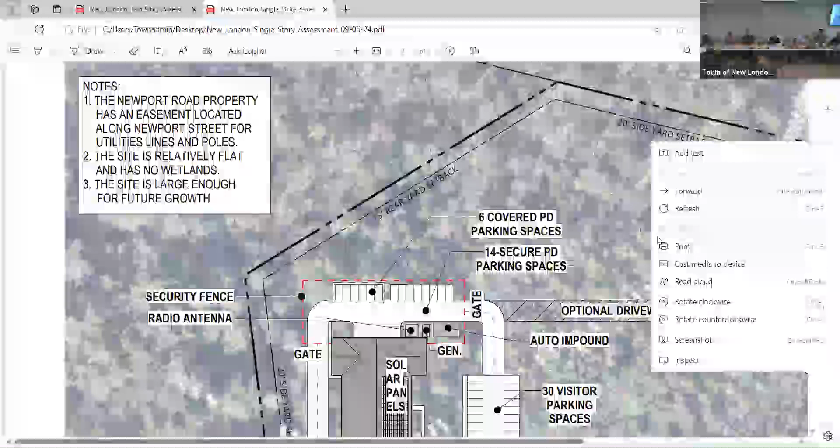As Tony mentioned, and John will talk about in detail, the Main Street site really doesn't lend itself well to a one-story building. Because of a 28-foot drop from front to back, it really wants to be a two-story building. The next step for us would be—we're gonna have a recommendation for you today that John's gonna go over as to what we believe is the better of the two options, the two sites.

But the next step for us is to do a space plan that would show the actual spaces within each block of color. The color blocks are program blocks based on the approved space program. And we'll do a more finished exterior approach to the building for your October meeting and for sharing it with the community here in town.

Once we go through these options, you might have a direction, even though we just received these. I think once we go through them, you might have a better idea. John, take it away.

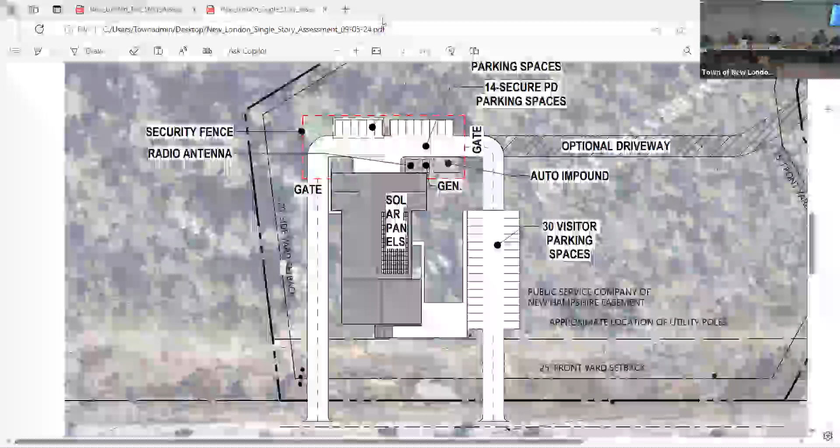Thanks, Bob. So we're gonna look at the Newport site. Both sites, Newport and Main Street, have pros and cons with them. We'd like to try to highlight those as we go through. Looking at Newport, basically parallel with Newport, there's a 25-foot setback. There's also an easement for utility lines. So that's a visual right off the bat, but we can easily work around those.

This site is large enough that we have flexibility to push the building back, or the whole project back far enough, to give a buffer from that easement, so that you guys aren't running on top of the lines.

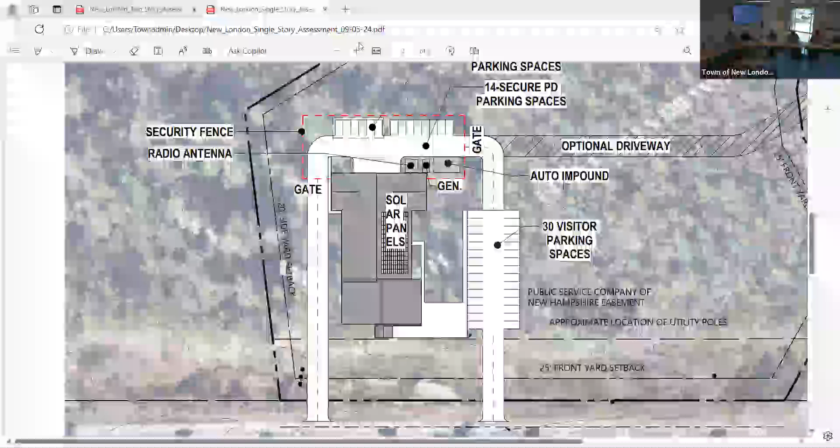So what we did was we set the building back about, I think it was almost 75 feet off the road, which is basically perfect for policing. It gives us that security buffer from the main road and avoids any sort of traffic getting close to the building.

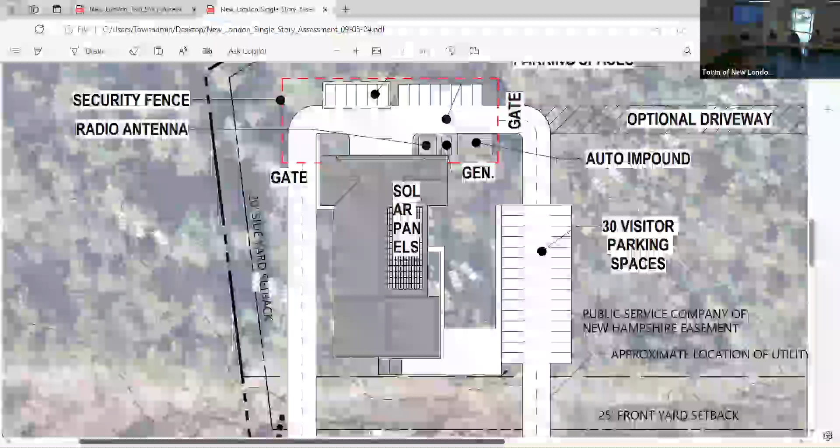But on Newport, it's a 1-story. We could easily do a 2-story, but we highly recommend 1-story because it's better design.

This layout is basically exactly what we talked about in our last meeting. So we did a 1-story, 2-story option. We took that 1-story and we integrated it to the site and adjusted it accordingly.

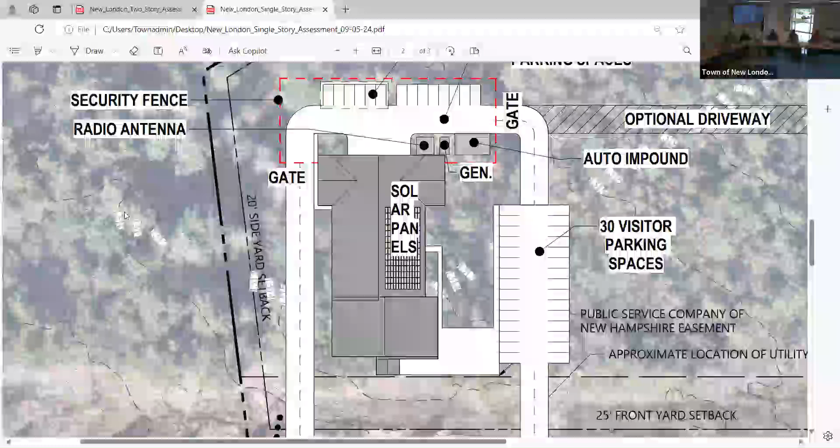There's really not a lot to work around. This site is relatively flat, which is easy to build on. There is no wetlands that we're aware of as of now, except for in the front, and we're going to avoid those anyways with easements and setbacks.

So we can accommodate 30 visitor parking spots. We can accommodate all of the parking in the back for secure parking.

We currently are showing 2 means of egress. The one on the left would be the primary exit and entrance to the police. The secondary would be going through the visitor parking lot.

So the last thing we want to do is share a driveway for police or visitors, but it would be a secondary. So again, it's the main one, and that could be blocked.

You guys have a second means to get out. We are also providing an optional driveway to Hilltop, which I believe was a private road. We have to get approval from the landowner, but it's an optional driveway that gives you that second means for strictly police, and then you're not interacting with visitors.

We are accommodating solar panels for now. That's basically kind of a benchmark of where it could be, how much we have. We do understand solar is important to the town, so we've oriented the building properly to do future solar if you guys want to.

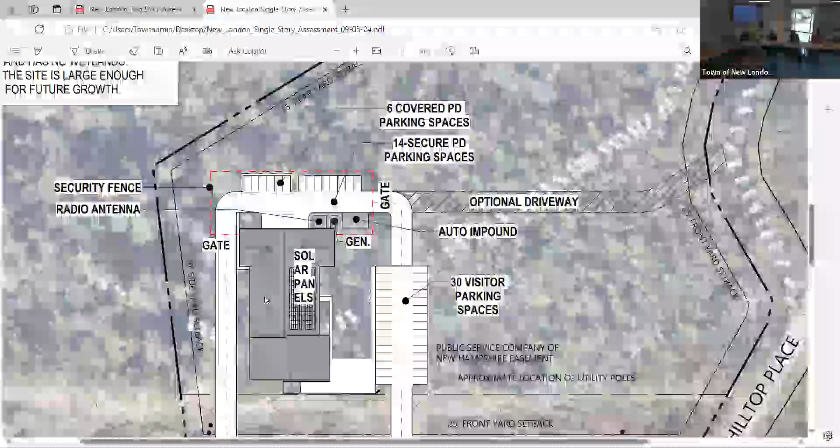Other than that, the one other thing that I want to point out with this site is that we pushed the property to the left lower corner, which allows future growth to the back and to the front if the town deems that they want to do something on that property, because there's plenty of land there. We didn't want to put this right in the middle of the property so that you can't do too much.

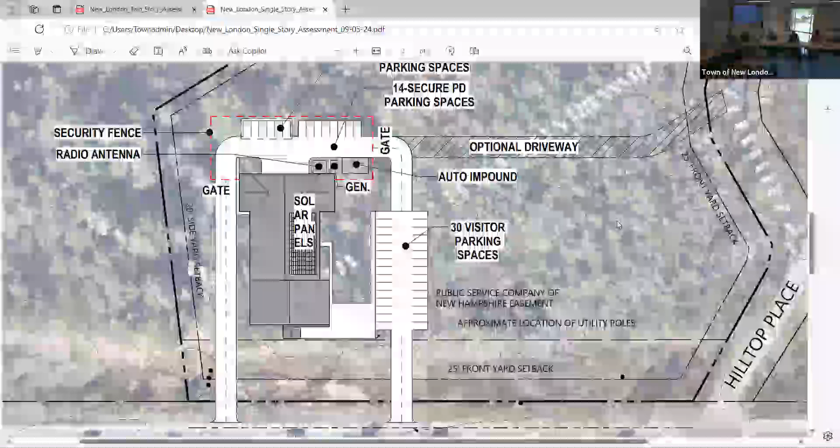So there's plenty of other land there that could be some town buildings if that was decided on. The only other thing is we do show up to 6 covered parking spaces, which programmatically was something that was mentioned in the program, right? And the other thing we did is, to your point John, is we want to stay away from Hilltop as well, because we wanted to have a clear driveway, and Newport is, I believe, a state road.

So it is a very good site. I don't know if you want to read the 3 points, John. You basically already covered it, so yeah.

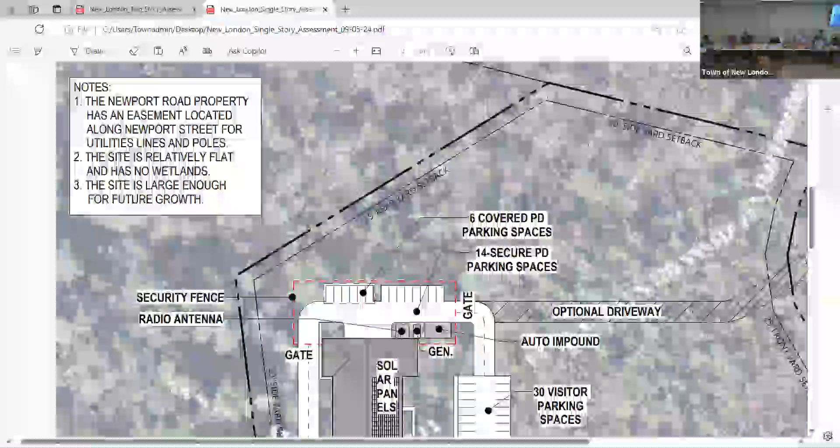Newport is a state road, so we are limited on the amount of curb cuts that we can do. We are doing 2, which I don't think is going to be an issue. Plus, they're far enough away from each other that it wouldn't be an issue. Typically it's like 50 feet or more, I forget what it is, 50 to 80 feet, something like that, that they need to be separated from each other.

So this is really what we came down with: two new entrances to the property, and then a potential third to Hilltop. Yeah, and just as we move to the block plan, John will walk us through the operational adjacencies and how the building would function.

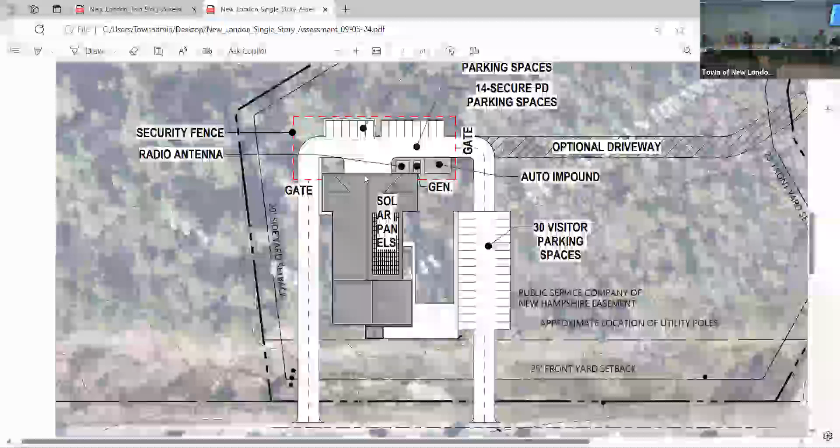We definitely could do a 2-story option here, but you're adding square footage, and there's enough property to build a 1-story. So it's something we could talk about after we're finished presenting.

All right, I don't know if you want to continue. If anyone has any questions, we'll hold the questions after. Yeah, I was just gonna say, but before we move on to the block diagram, I want to take a moment and see if anybody has any questions on this slide.

Susan, send your mic.

Good morning. Could you tell us again the total acreage here? I believe this was 7 acres. So what does this layout include in that 7? So in the future, it would probably be 4.5 or 5.

The other thing that's notable about this site, and that's true on the Main Street site too, is that it gives us the setbacks we talked about where we're not putting visitors up against the building. There's a security setback, which we want to be at least 50 feet, ideally more. There's clear separation of public versus police staff and cruiser parking, and there's 2 means of egress. The other site does that too.

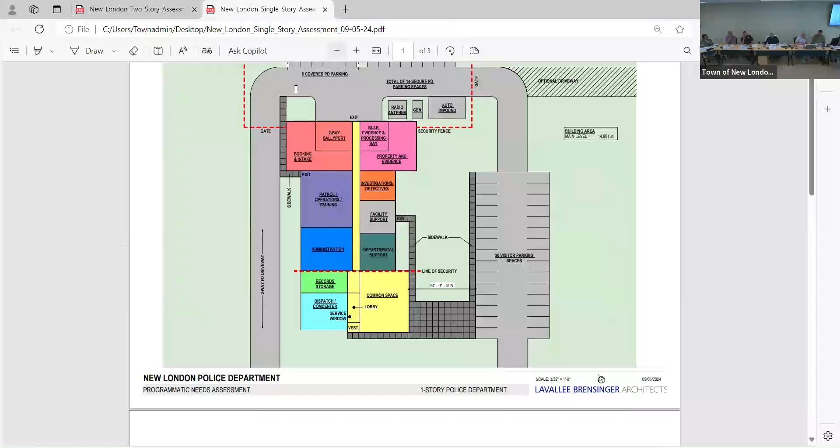Some of the benefits to this site are future growth, like we work with other towns that do gun ranges and things like that for the future. Again, we don't need to plan them now, but you have the option to do it. There's those opportunities for training on site instead of off site. You can do anything with that site. You could put a playground there. You can do whatever you want.

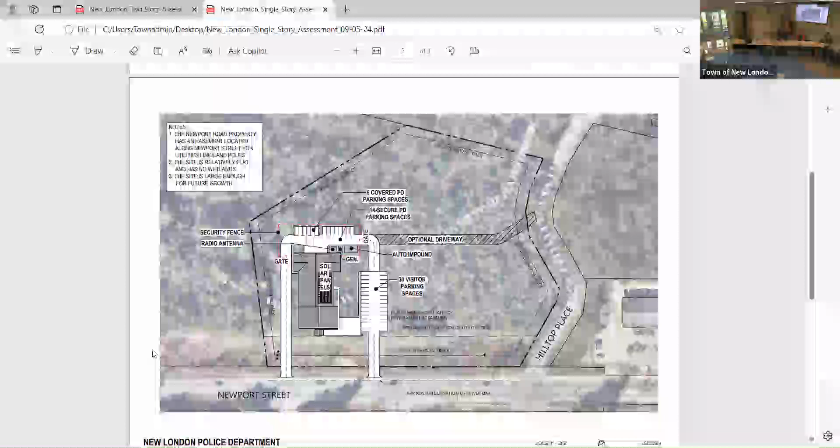There's plenty of land. Phil, you got a question? What is the preferred orientation for solar panels? Is it directly south or something? So you want to have a roof surface facing south, yes. This looks like it's more southeast-ish. We didn't angle it exactly to the optimal angle and stuff like that, we basically have it perpendicular. But as we develop the project, we would take those into consideration.

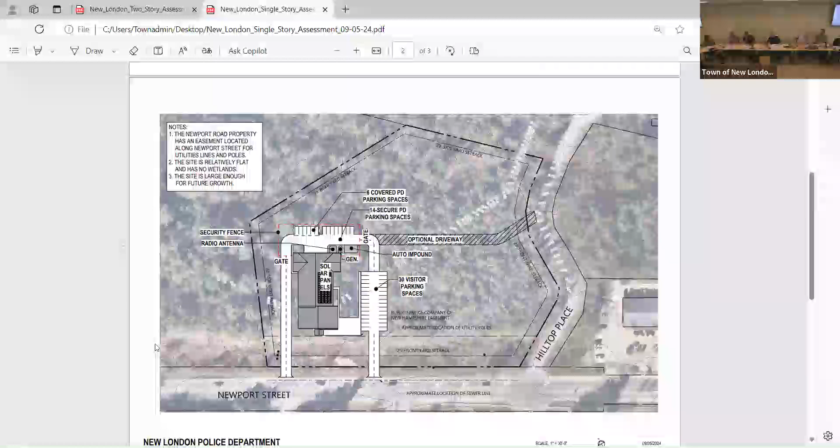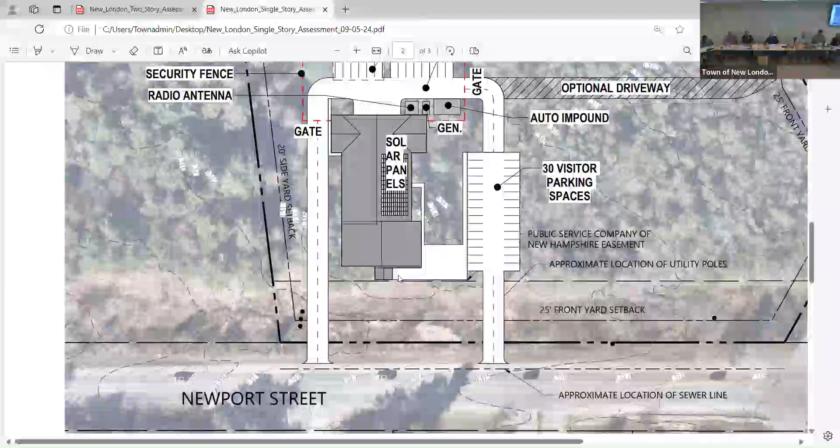Is there any recommendation for a recommended distance from the power line easement for a building to be? I know you said we can push this back a little further. I wouldn't want it as close as possible to the easement, and that's not our intention either. We have a buffer. I don't know if there's a specific setback from the easement, because the easement is the setback. The power lines are not right on the edge of the easement, they're probably somewhat in the middle between the easement line and the property line. So the building would not be on top of it, and that would be the last thing we want to do as well, visually.

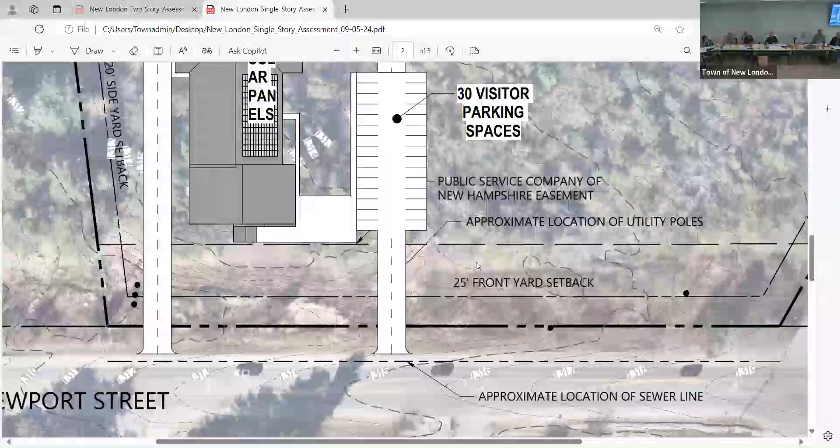For both of these sites, once we get past today, especially if we come out with a front runner, we're going to have our civil engineers give it a look. Right now, what we used for doing these was the original site limitations plan that was done with a power line setback. Then we'll have VHB give it a final look after today, once we know where we're going. The building's pretty far away, it's not an issue, we have room to push it back a little more.

My next question is, as far as the access to and from Newport Road, you have 2 driveways, one for police and one for public. And I assume 2 means of egress is recommended. Yep, that's a minimum of 2, yes.

Is there any thought to having one single driveway and having it wide to the left and then to the right? Because I can envision somebody pulling into the police-only driveway, seeing a sign, getting confused, and possibly backing out onto Newport Road. We do signage like that, this would be police entrance only. Not that that would probably stop some people, but every project has the same conversation, it would be signage. But the other thing is, you have to have a minimum of 2 driveways and 2 access points, because if one gets blocked for any reason, sharing an entry point and then branching off would not be advisable.

Ideally, what would be nice is to bring the gate closer to the road, but we want to keep that gate towards the security fence. That's a detail, to be honest with you, a real detail. But you run into that all the time, even with gates, people still will pull in.

Yeah, I actually share that concern as well. If I'm looking at this correctly, we're probably right at the crest of Newport Road where the post office is, and I do worry about folks potentially trying to back out on that crest of Main Street, but I think the point is noted and we can certainly revisit.

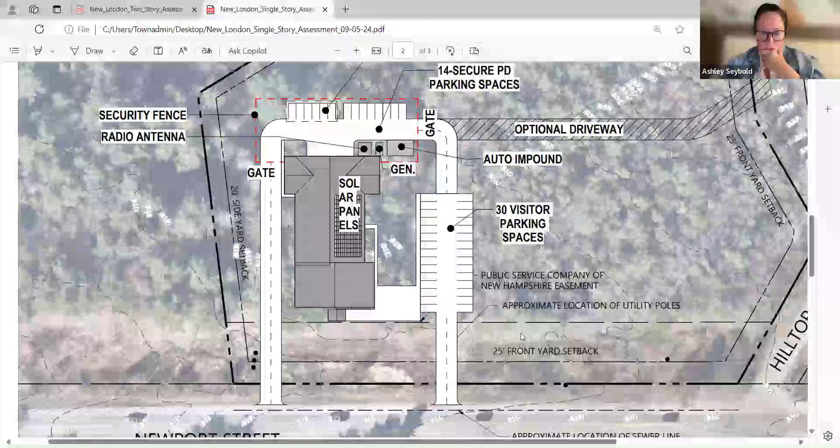Honestly, that's a real detail at this point. I think it's the siting of the building - the fact that you can build it, put the parking, put the setback, have two distinctive driveways in and out. Those are the key things. The things you guys are bringing up are great points, but they're really details for the future. All great points for sure.

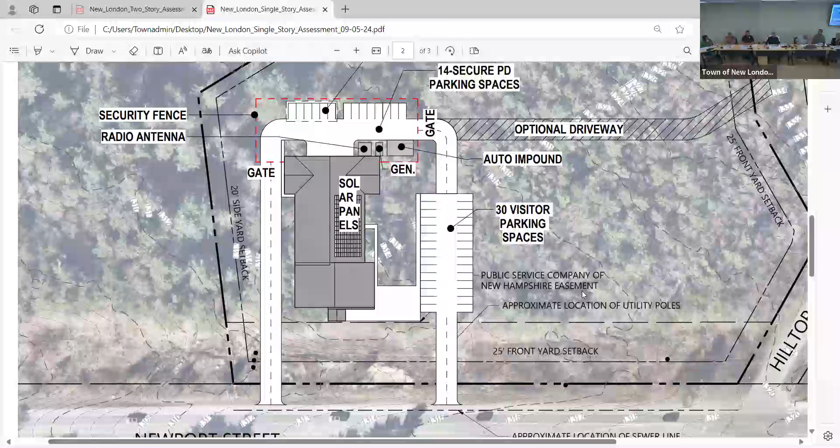Are there state requirements for either site regarding, like in front of the fire department, stoplights or a way of changing traffic flows in case you need it? Yeah, signaling for PD is not something that's generally done. If this is a fire station, yes, but to put signals in is very expensive. We're dealing with that in another municipality in New Hampshire - I can't remember how much it was, but it was several $100,000. We don't recommend it for policing. The chief can speak to that - there's no requirement.

The lights would be the vehicles. Hopefully everyone's gonna stop and let them go.

You want us to move to the next part? Other questions? I think we're good to move. Perfect.

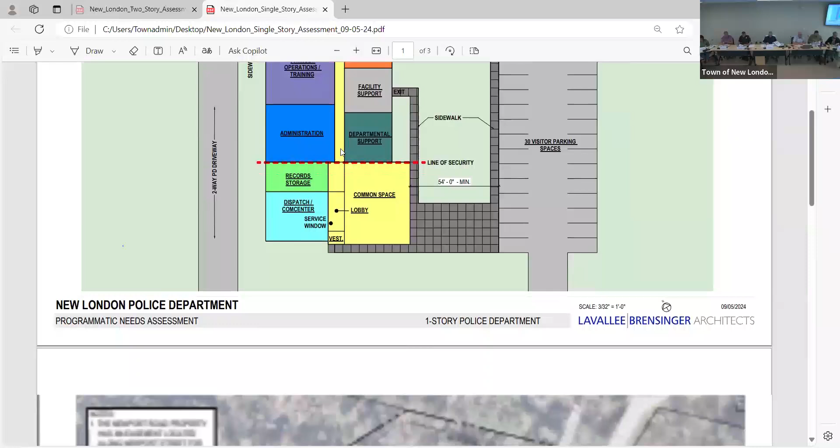So we're gonna look at the plan, not much different from what we talked about last time. We did some minor modifications per the chief's request. The only change was we switched dispatch and records so that administration could be closer to records, but other than that, all of the adjacencies are exactly the same as last time. You can see we have a secure line that basically separates visitors and PD, so the visitors can use that public space on an as-needed basis. And then we can shut the back of the building off so we don't allow anyone that's not supposed to be back there.

I don't know if we need to go into depth with this unless anyone has any specific questions. I think my only question is, in this scenario, are we sort of mimicking the use of the dispatch and command center now, where they would be the first greeters for any visitors? Yeah, so typically what we do is we set up records and dispatch to have a service window. Just in case dispatch is on a break or busy, records could take over for any sort of visitor.

So yeah, someone would be staffed in that records space? That's the idea, the chief will know. Yes, that was an important point. I'm glad you brought that up actually - if somebody just needs to come in to pick up their accident report, they're gonna have someone, the administrative assistant, able to respond to that window and help them out instead of asking dispatch for it.

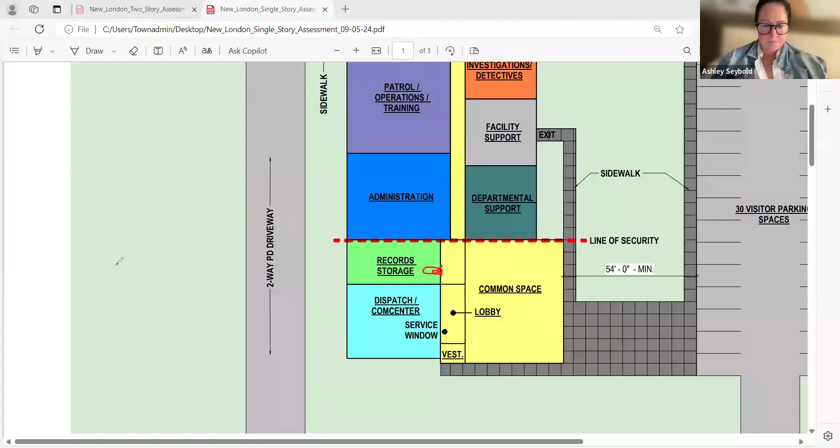Is this seen as sort of a hard corridor with a bunch of doors, this kind of building? Or is this more of a bubble diagram where some of these spaces are open to the corridor and some are obviously enclosed? There will be nothing open to the corridor. So what we try to do is create a spine to minimize circulation, and then we can maximize the program space.

We find this works great on a one-story building. It does lend opportunity - doors are going to be off those corridors, but we can also have glass off it as well to let some natural light in from the outside. So again, we take all the opportunity to apply those rules.

Yeah, I would just say that when you go to the public areas - I don't know if you can see the mouse when I move, it's a very small mouse - that area, the public area, there's a modest lobby, and then there's a common space which is the community room, training space, and there's a public toilet there.

All the program pieces that go with that common space. So the area that's publicly accessed would be the lobby and the vestibule, but the walls from the lobby into dispatch and into records would be projectile resistant. It would be hardened wall so you couldn't tell. It would look like any other wall, like the wall behind me, but it would be resistant to gunfire, basically level 5 or level 3, whatever we decide.

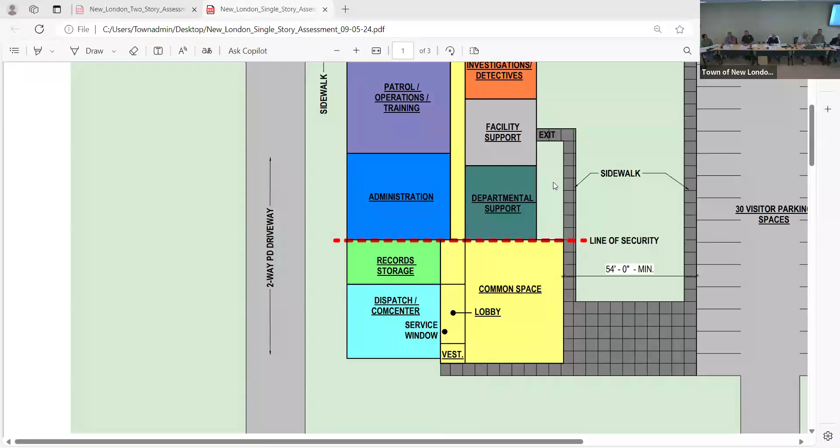Some of these are suites, so they're self-contained. Others may be more open, as John said, but the next step would be to do that final space plan, and that would show it. Right now, administration, everything that's admin is in that blue block. Everything, all the program spaces, right, John?

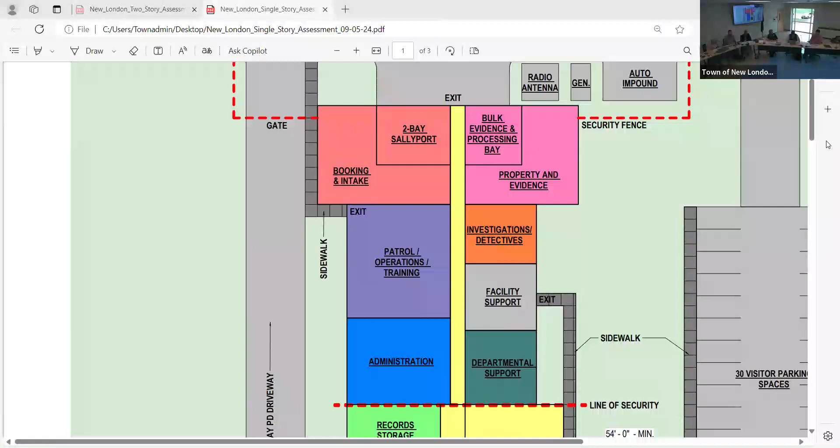So yeah, to add to it, each block has a security feature to it. We do not want them open to the corridor at any time because of security reasons. But what we do is take the opportunity to make it an open concept within each box. And the chief can speak on what we've done on Lincoln.

Within administration, around the perimeter we do the hard, private offices, but within the center it's an open concept so that it doesn't feel smaller than what it is. And we try to apply that design to each one of them.

Same in detectives investigations, but again, we're not there yet. We're looking ideally, maybe even today, but hopefully next week rather than waiting two weeks, to come up with one of these options that is preferable. We'll go through both of them, and then the next step is to do that space plan and make something that looks less like a box on the outside.

So keep going, John. Yeah, the next exercise is walls, doors, windows, getting into the space plan. So this is where we start.

You want to keep talking, I'm just scrolling down for you. Oh, I'm sorry, I'm not looking at the questions.

What I don't see, I know we've talked about the Sally Port and the issue we have now with storage in the Sally Port, and ideally we don't want that. I don't see a designated area for storage. I don't know if it's incorporated in one of the bubbles.

It's in there. For this site, would it make sense to consider a separate building, a separate garage structure, maybe to the left of the secure PD parking, that can be used for cold storage? Within the space program, we've accommodated for storage.

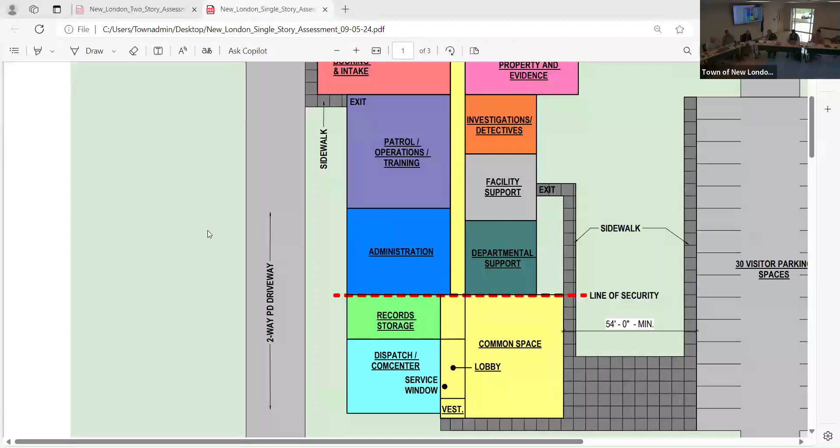Space needs assessment, whatever page administration is on. That will have chief's office, lieutenant's office, admin assistant, all of those things are incorporated into this color block, that blue block. And the blocks are correct sized in the diagram.

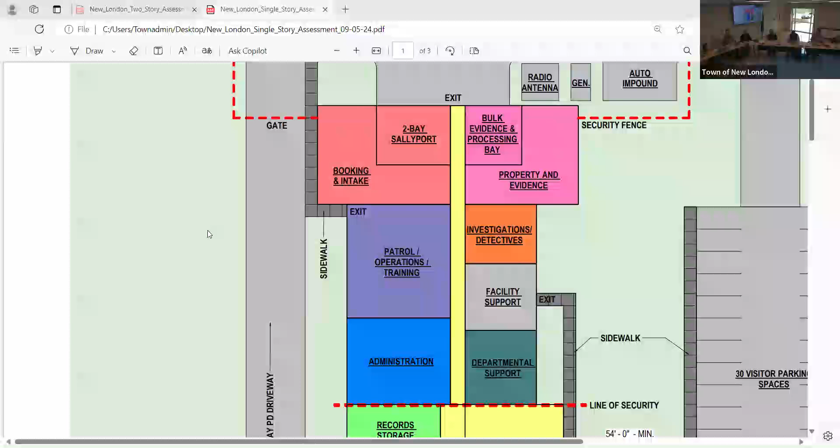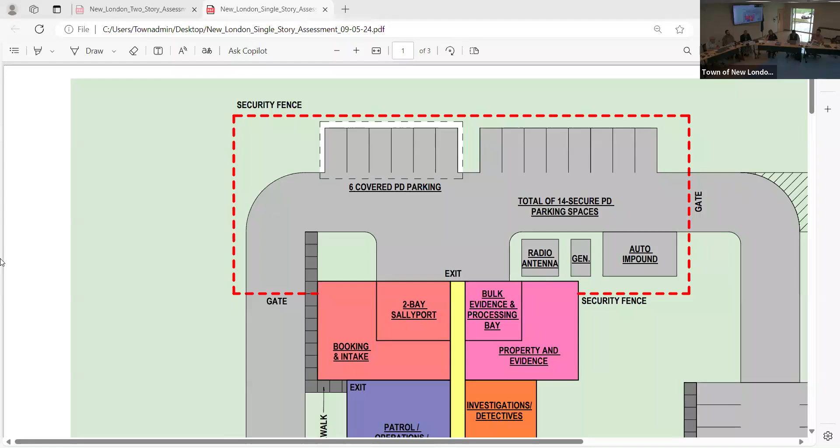Do you want to talk a little bit about the progression to the back, regarding auto impound where the radio generator, everything's within the... We kind of, again, so the red dash lines in the back are representative of a security fence, which is gonna secure auto impound, the generator, the radio antenna. So if you take your location right now, all of that stuff in the back would be fenced in, so that no one can get to the radio antenna, to the generator, the vehicles are separated. That's basically where we got a space for everything within this property.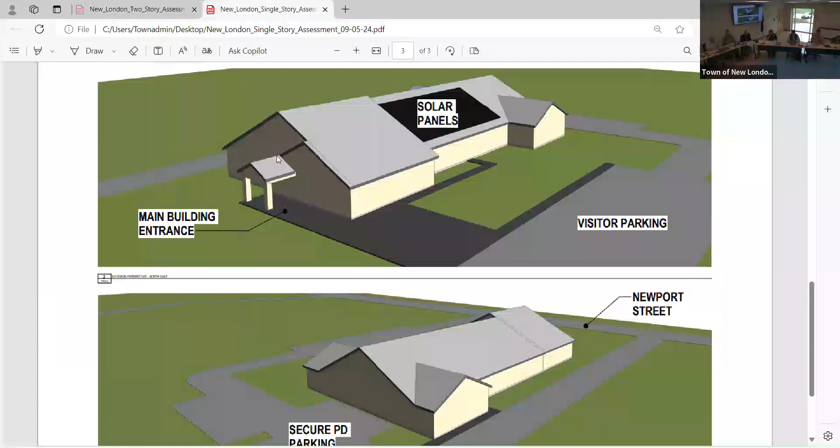Do you want to go to the 3D? You can go to the image. Okay, so what we've done right now is just a simple massing, just to give you an idea of what the building could look like. Our thought is to tie it into the community so that it blends in, the materials and finishes, we can get into that as we progress, but I'm thinking this could be a clapboard type siding with some stone or something to tie it into the community.

We find that a gable roof is a perfect situation for tying into the community as well. This could simply be a flat roof box, which says commercial all over it. But we feel this lends opportunity for additional space in the attic where we can take opportunity for utilities, and it provides space for solar panels on the roof.

I'm not sure if I got anything else, Bob. You want to add anything? No, I think this is just the first go at it.

Again, the next step, if we come up with one particular site and option, would be to develop this a little bit further and give something more about the character of the building in a very conceptual manner. But it would be obviously contextual to the town, and even though on this stretch it's a little bit of a highway with a grocery store, a post office, and other things going on there, we'd do something contextual and scaled nicely so that it's not fancy, but it's gonna look nice and fit into the community.

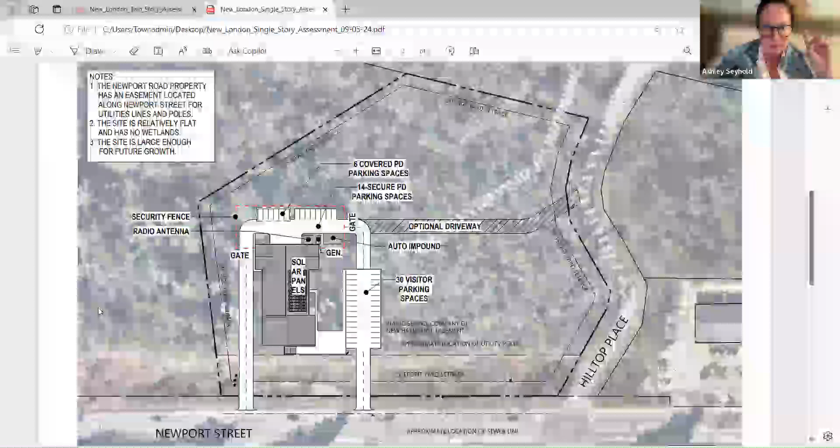Before we move on to Main Street, I want to make sure we open it up for any additional questions. I do have questions around the power lines. I believe on Newport Road, the poles and the lines are run right up against the street and they're sort of low. Would we try to bury those? Would they stay that way? And also, is there any issue with the large antenna being close to power lines?

The antenna is actually not that close, it's at the back of the property, all the way at the back. Let me see if I blow this up... I don't think that's an issue at all. As far as the power lines, if we were doing fire trucks with 14-foot plus clearances, maybe, but as long as those power lines are high enough that a fire truck servicing this building would be okay with the clearance, I don't think it's an issue.

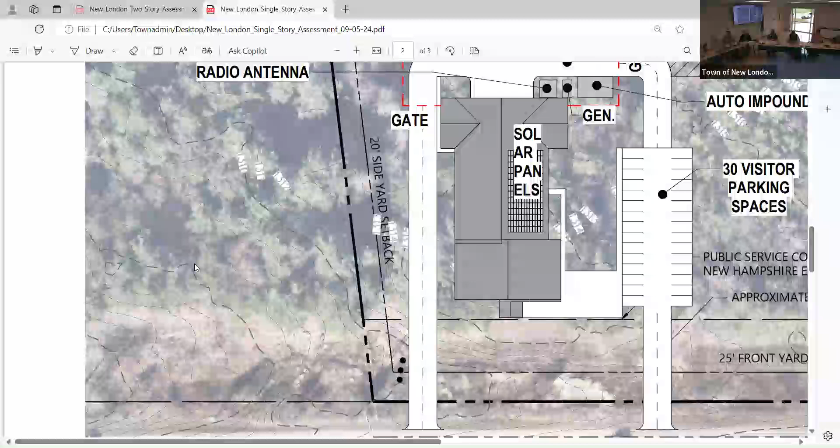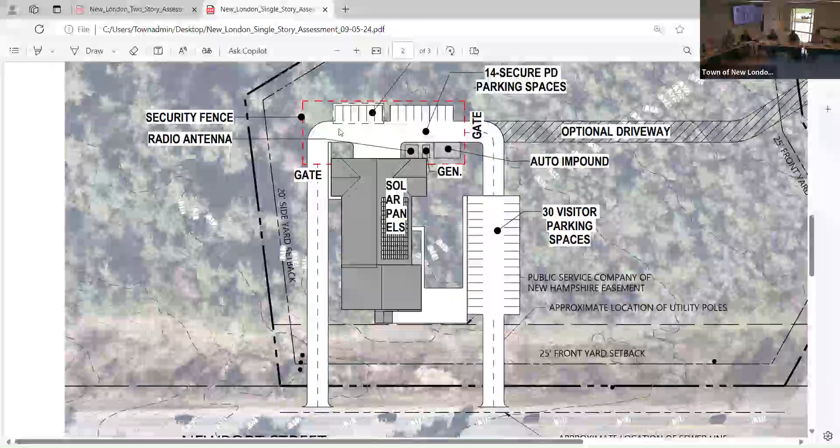But again, that's kind of minutia for the future. I think you guys are doing a budget for this. We will have our civil engineers look at both of these options. We just waited for today to do that, to get any other information they may want to pitch in on the sites. We visited the site last time we were here and didn't see any issues with the power lines for any sort of access for emergency vehicles. So I'd recommend keeping them as is, because reworking that would be quite a cost. I'd rather take that money and spend it on the building and the property itself.

Chief, I have a question for you, and that is response time. Getting up to this facility, the elementary school, from that location, are you comfortable with being able to do it fast enough?

Police officers aren't typically at the station when calls come in. They could be checking a house out on King Hill Road, the very end of King Hill Road, at the same time some sort of active incident were to come in. So we are ready and able to respond from anywhere we would be located, and primarily the patrol officers are not in the station to be able to respond.

Tony, you're gonna run off and start pricing this stuff. What kind of construction are you talking about for this building?

It's a collaborative effort, understanding the contextual scale of this building. We'll look at different options of roofing, siding - clapboard has many different options. You can get HardiePlank, you can get cementitious, you can do wood shingles. It's about the backup and what's behind it. In those hardened areas way in the rear of the building, that's going to be a lot of block construction. Does it get strapped out and furred with clapboard over that to change the appearance?

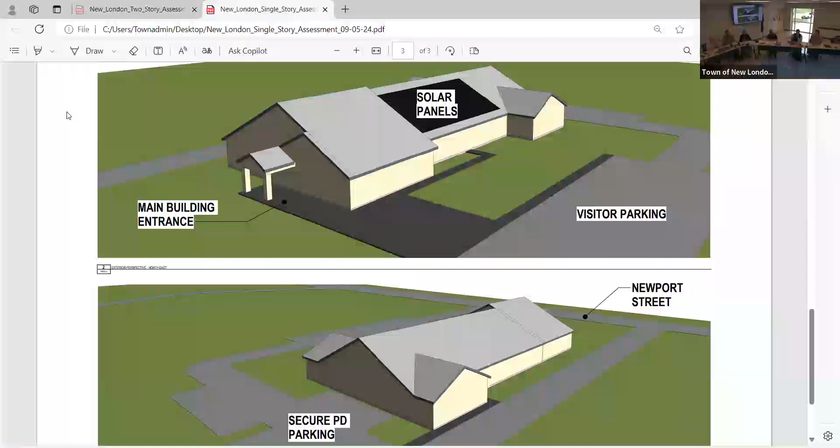Generally non-combustible, but the way police stations are set up - Bob, if you can go to the floor plan - we've basically got two different code use groups here. We've got the front, which is public, more assembly use, and then you've got the institution. So those are gonna have different construction methodologies.

When I look at this building, the roof line lends itself to swinging trusses up there and doing a wood truss. It's single story, I don't see a lot of steel frame. We'd have slab on grade - there's no need to dig out a basement space and pay for that excavation. So those are the types of things that we'll be working through.

It might be helpful to have John take 2 minutes and talk about Lincoln - a very similar building that's almost done, about 2 months from being completed. John can talk about how that's constructed. We'll work with Tony on coming up with a basis of design of some kind. John, do you want to share some of that?

This building is right around 14,000 square feet, so we'll look at either metal studs or wood framing, and work with Tony on which price is better. Lincoln we actually built with wood studs and pre-engineered wood trusses, which we found to work the best. We can get clear spans and minimize steel. What we try to do is focus our trades into one location instead of mixing them.

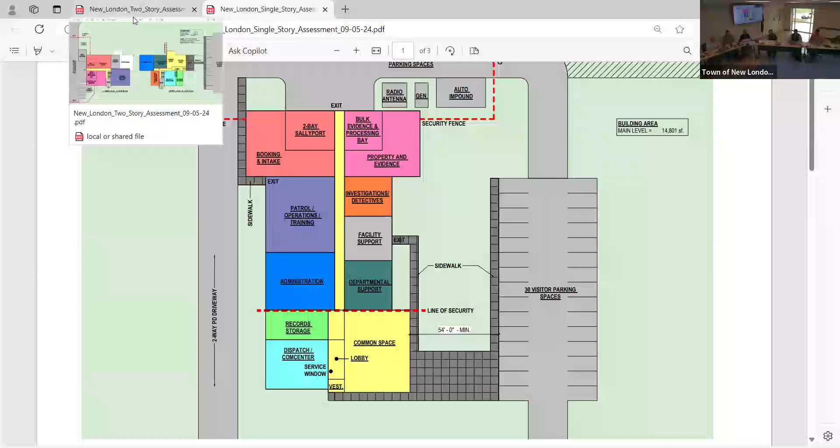We can go to the next one if you want, or more questions there. We good? I think we're good. Okay, I'm going to start with the site first. I don't want to shrink it more than this, because for those folks looking on screen, you can't read it, but walk me through it, John. I'll move it around, okay?

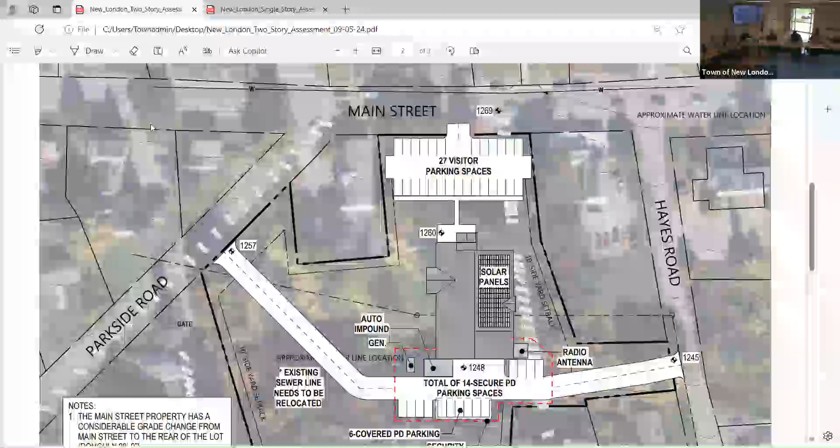So one thing I want you guys to remember is the pros and cons between each site - there's some challenges to each of them, one's a little more challenging than the other. Kind of big picture, if we were to start from Main Street and go all the way to the back of the property, like Bob says, there's a 28-foot grade drop, which is considerable. It challenges the parking at the driveways, the slopes.

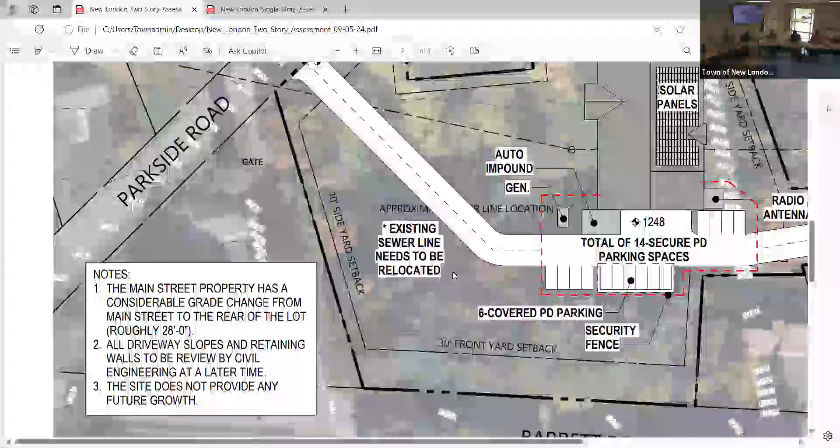Retaining walls are probably definitely required in here to make anything work. But what we've done here is oriented the building to basically a 2-story option. We have the Sally Port, a lot of the police stuff - Sally Port property evidence, patrol, investigations - are all on the lower level, so that they can have direct access to the back parking for PD. I'm gonna stop for a second.

So if you look here, again my mouse is very small, you can see we put some benchmark elevations here. So I'm sorry John, I just want to point out that we have them here at 1260 and so on. So keep going, I'm sorry. Yeah, so on the lower level is again all of the police departments. On the top is where we're providing a lot of the visitors - we have the common space, we have administration, we have the departmental support up there. So it's functions that are fine on the upper floor, and then it provides that proper separation.

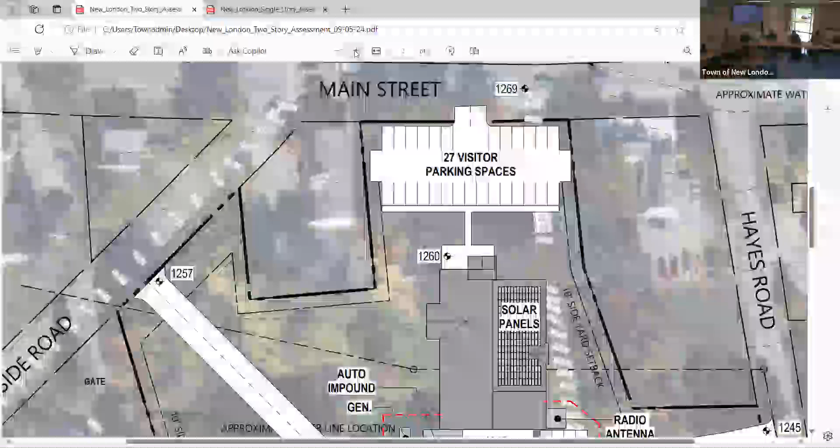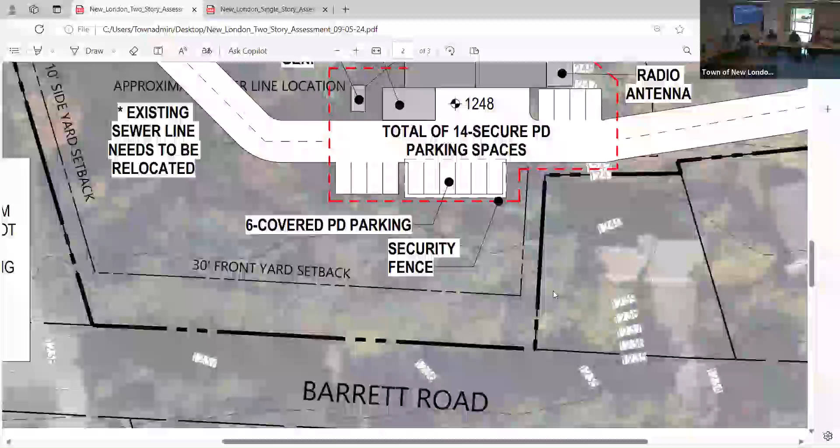So in the front, right off Main Street, we have a parking lot for 27 visitor parking, which is separate from PD driveways, which is great. What we've done is this site has 3 roads, which we don't typically have this option. So we have 2 exits, primarily for PD, which is a plus.

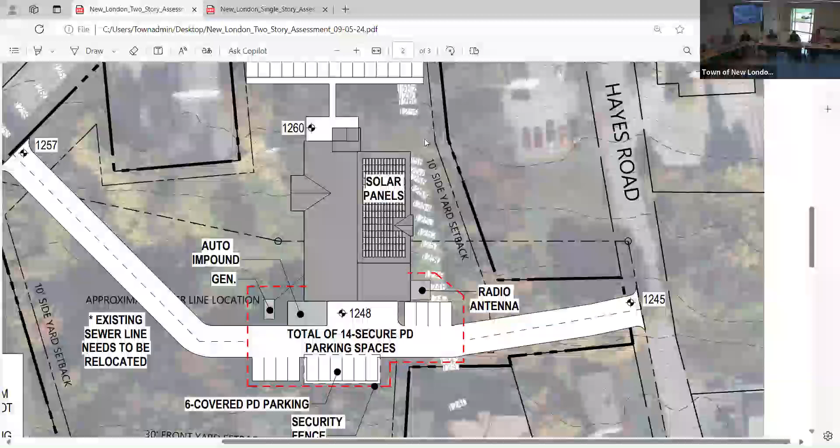And we're accommodating all of the parking in the back that's required for the department. Again, this is probably a challenging site just for slope. Windows on the lower level are probably going to be minimal because of the grade change, but we're going to try to take the opportunity to get natural light in there as much as possible within reason.

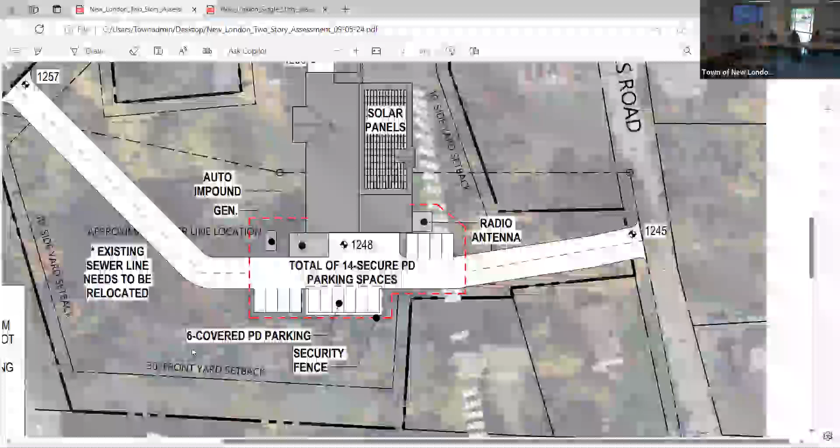Site does not lend any sort of future growth just because of the odd shape of it, the grading. So again, there is a little bit of space out back for potential training for PD, but again, it's a slope site.

We are providing all of the amenities, so the radio tower, the auto impound, the generator, all of that stuff comes with it. Solar, we've already oriented the buildings to collect solar if that was an option as well.

I think the big thing to take out of this one is just the slope site. If you look at the other site on how easier it is to construct this building versus a slope site, it's like night and day.

I think just looking at this public parking, we're waiting to present today. Again, before we share things with civil engineer, we were very aware of the slopes. That's how we show the benchmarks. You'll notice that even from Main Street at 1269 as a benchmark, and then the building's maybe at 1260 or 1261, let's say. There's an 8-foot difference there.

So how you move from the parking to the building, it has to be fully ADA accessible. We're going to look at that.

One of the things we're telling you as we go through the rest of this option is that there's going to be definitely more cost to this option because, as you pointed out John, we have 2 stairs and an elevator. That's about 1,200 square feet. You're going to have a series of retaining walls, some ramping, things of that nature on the outside of the building. And it also requires more site work as well, potentially, like roadways and so forth.

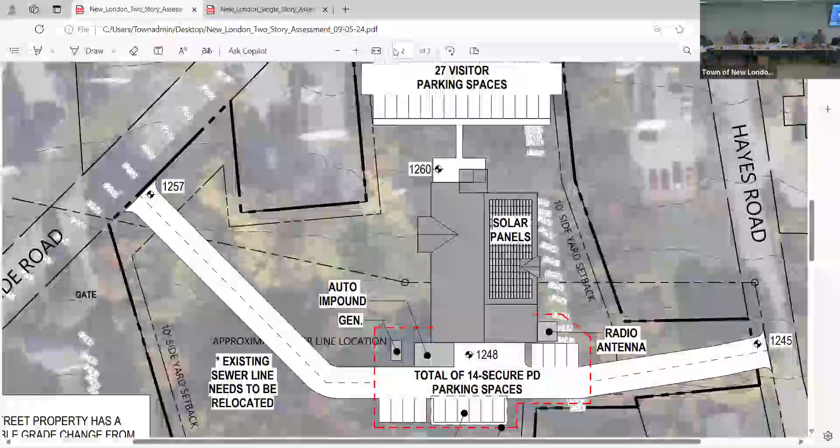One other thing to point out is there is an existing sewer line that goes pretty much through the middle right of the property, which would have to be relocated. So back to Ashley's comment on the power lines on Newport, we don't recommend modifying the power lines. So on this one, there's a lot of site constraints that would come with cost.

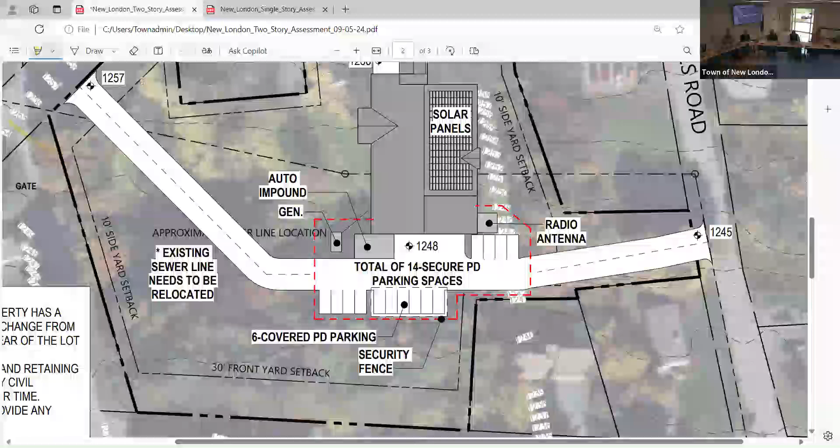I don't know what that cost is, but it's more than the other property. So that's something to kind of consider - where you want to spend your money. I would prefer to spend it on the building and try to minimize site work as much as possible so that we can get the building that you guys want.

Any questions on the site?

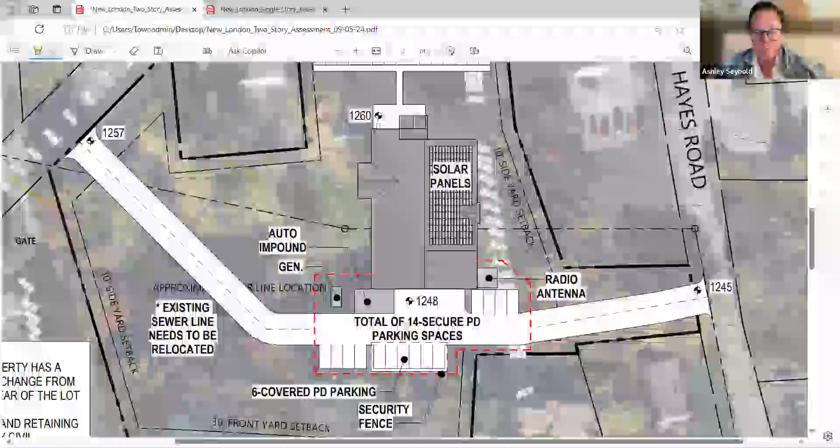I have one question, and this is really just more of my own edification. I'm assuming it's fine, but we've got the radio antenna tower there, and TDS has theirs, 200 feet to the right. Is there any issue with having 2 towers of that size? Will they interact with each other? Are there any issues that would cause a problem?

We would have to get a vendor involved just to make sure that that isn't a problem. So currently right now, this is only a placeholder. That doesn't mean that the radio antenna can't be on the other side of the building, but once we start developing this property, we get a vendor like Ossipee Mountain Electronics. They would tell us exactly where to put the antenna. That would be the next step.

Yeah, I mean, the radio towers will be on different frequencies, but John's right - they'd have to be researched and looked at in the next phase. 200 feet is - if they're on top of each other, it could be a problem. Also depends on the height and how far each one has to reach.

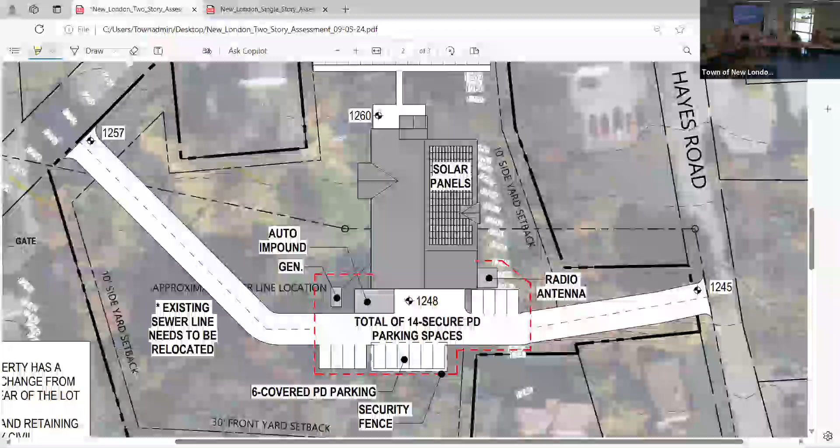Yep, so it's kind of a complex answer, I guess. Thank you. Any other questions from the committee before we move on to the block diagram?

Yes, the lady here. I have a couple of questions, or comments - I feel like the site work on this site is going to be a lot. I'm also concerned about the 10-foot setbacks on the Hayes Road side. And my bigger question: is there any concern about the access point on Main Street? It's right across from PC's, right across from the elementary school, and it's very tight there, a very busy area.

Yes, I'd say the other location is busy as well, but at least it's a much wider road. I do have some reservations about the means of ingress and egress for the visitor parking spaces, due to the other factors on that side of the road and its width.

One thing we liked is that we clearly separate visitors from PD. Visitors only enter from Main Street to the parking lot, which should be low volume. PD goes to Parkside and Hayes, which are side roads, before approaching Main Street. Visitors generally only need that lot a couple times a day - it's sized that way because it's mainly used when the community room hosts training like police night out or neighborhood safety training. So traffic out of that public parking won't be heavy, if anything it might be more traffic after hours rather than during the business day.

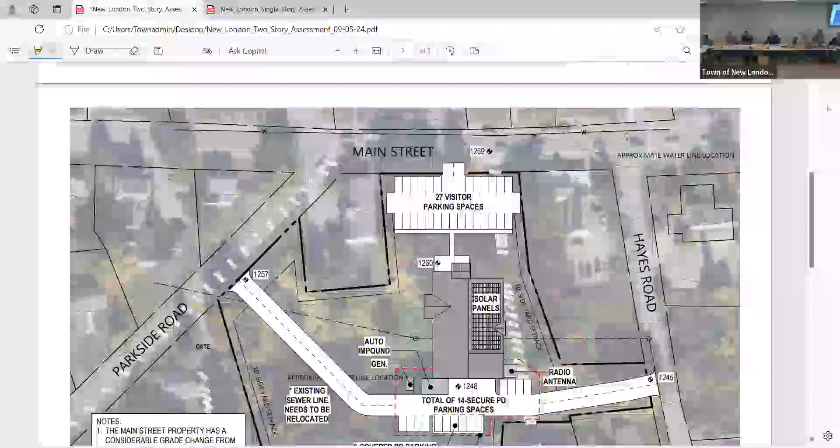Shall we move to the block. I think so.

All right, well John will walk us through. There's a note there about the added footage in the upper right corner. Go ahead John, I'll blow up each floor for you.

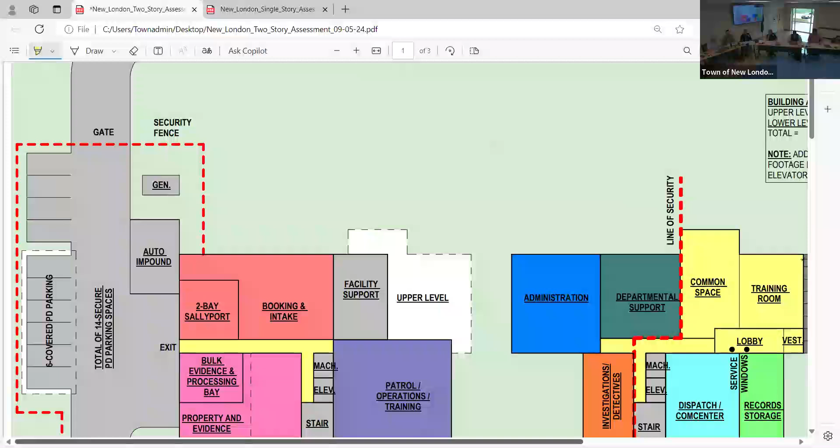So the two-story option differs slightly from the last one you saw, because the site kind of tells us what we need to do. Starting on the lower level, we strategically picked the departments we felt would work there - sorry, you want to go lower level first? Yeah, okay, let me find this.

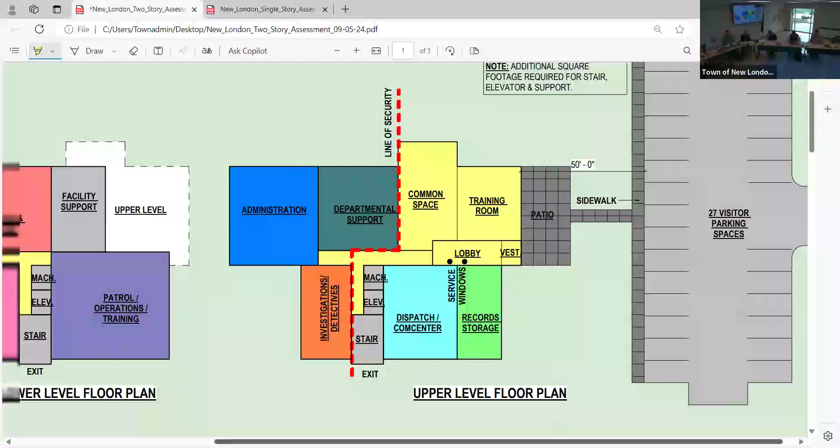So we strategically picked the departments we felt would work on the lower level. We want to keep patrol and property evidence all together - patrol with easy access to the back parking lot, and booking and intake close to property evidence. There are a lot of adjacencies to keep in mind: booking and intake obviously can't be at street level, so that has to be on the lower floor, and property evidence needs to be adjacent to booking, which tells us where we can work. So we're basically providing direct access to the back lot.

On the side, keep in mind there's a slope on each side - we can use retaining walls this time to break some of that grade back so we can get natural lighting. But toward the back, the control portion of it will be underground.

The white highlighted area, the upper level, is basically just foundation work that's going to be supported in the upper level. The back of the parking and all that stuff, most of that stays the same between a 1-story and a 2-story. So I don't think we need to really get into that too much.

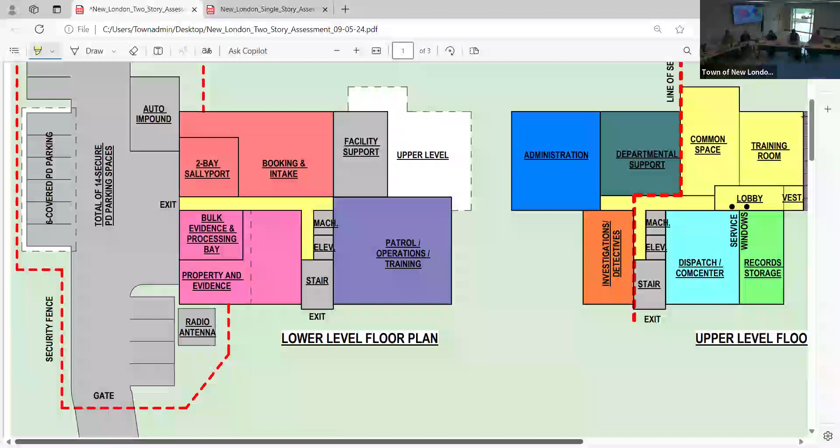Looking at the upper floor, in the front we provide the common space so visitors entering have access to records and dispatch and the training room. Behind the training room is where we have the fitness and agility room, adjacent to the departmental support, which houses the lockers, break room, and all that.

So every department has a specific adjacency. We don't want the officers walking through from the fitness down the corridor to the lockers. We try to keep those together so that we have that connection.

Administration is kind of tucked in the back, a little different from the 1-story, but again we're trying to compress this building to a certain square footage so that we stay within the realms of the space program we worked out. The last thing we want to do is increase the building just to get a bump out or something like that.

Security measures are similar to the 1-story. The red dash line separates public from secure. So basically the whole lower level is secure, no visitor access at all, and then administration, support, and investigations are secure.

The nice thing about this option - well, in the 1-story administration is more or less the same - is if I'm a visitor to this 2-story building and I want to talk to a detective in investigations, or speak to the chief or the lieutenant, it's pretty close to the lobby, pretty close to the public entrance. Same way in the 1-story option. You don't want to have to parade somebody through the whole police station all the way back to detention to speak to the chief or somebody.

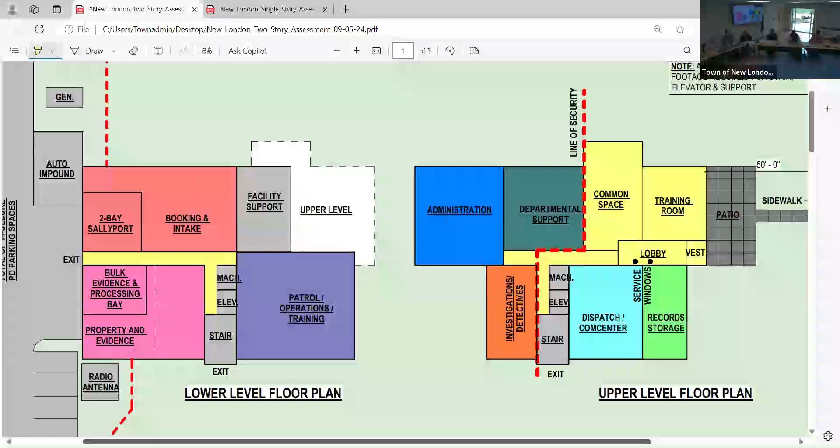The square footage on this particular option is right around 15.8. If you remember, our space program was at 14.2, which didn't include stairs, elevators, and additional circulation. So keep in mind there's a 1,000 to 1,200 delta between 1-story and 2-story, and that's where the additional cost comes in for 2-story options.

And that would be the same on the 1-story option, whether it's here or somewhere else - it's the same for me. So, yeah, anytime we can do a 1-story, that's the preferred option.

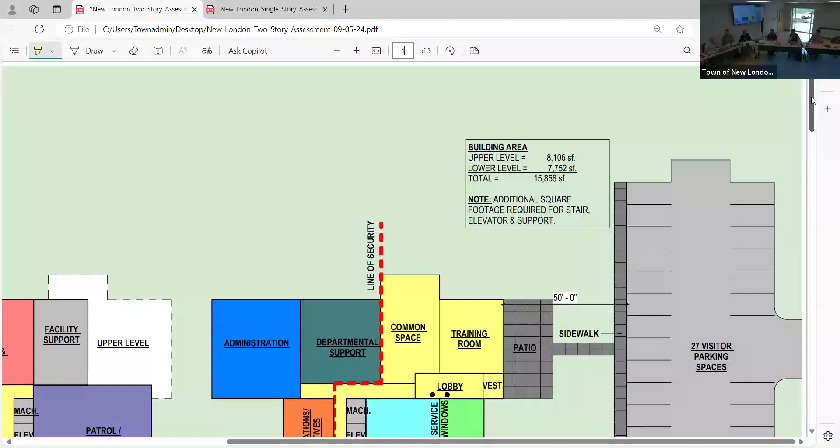John, in consideration of this, if we're still considering this site, could you include the 80 feet of ADA ramp that's going to take to get from the visitor parking down to the main door? Right now you just have a little simple sidewalk, but it's going to require 80 feet of ramp for switchbacks.

There's a lot of site stuff that is going to be challenging. Those are the things that we want to think of now and determine if this property is even worth moving forward, to figure out how many ramps we need, because there's a lot of grade change.

Yeah, I mentioned at the site a few minutes ago that between the public parking and the entrance of the building, it could be a 7.5 to 8.5 foot difference roughly. So you're right, we don't show that right now.

We could definitely show that in the next iteration if you really want to consider this, because we're going to have a civil engineer look at it as well, and they're going to mark up a lot of areas where we need retaining walls. We also have to double check slopes on the access drives - these are for regular vehicles, not fire trucks, which have real limitations because of axle length, but we don't have that here.

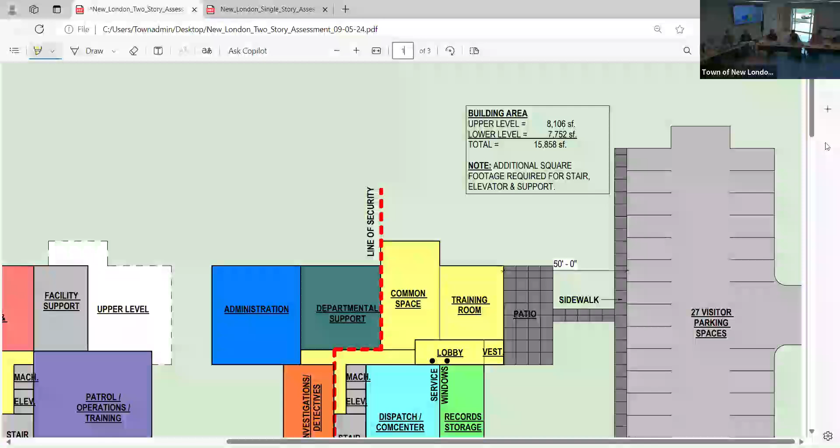So we didn't want to do all that if we looked at this option and folks decided it's not worth pursuing, or it is. You're right though - one thing we don't want to do is waste time and money on a site that's not going to be possible or is going to be too expensive. We want to try to be as honest with you as possible to help you make the right decisions. This particular site, grading, ramps, and retaining walls are a challenge.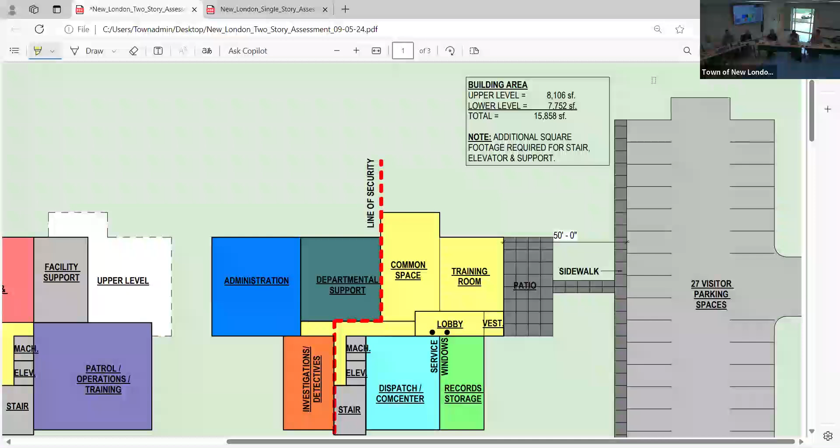And to show why this site was turned down, that's gonna be an important factor, along with retaining walls and all those other things. We didn't get into that level because we wanted to have a conversation with you to see, do you guys want to continue with this site or not? If you do, great, then we can go to the next step and get our civil engineer and start talking about the site requirements, because that's gonna help Tony provide a cost for that.

What's the difference between the cost of the two sites? I don't have it, I know it's somewhere, I just don't have it. Generally, as a rule of thumb, you could be talking about $1 million for a simple site, and that's as far as both sites are gonna have purchase costs.

I've got a question for, oh, sorry. Is there someone else in the room?

I don't think we have those exact numbers yet, and that was gonna be one question I offered to the committee: at what point do we start to have conversations with either or one of these property owners, the board or Kim, to start that conversation and see what the current interest levels are, making sure both are even still available and where the property owners are. You're gonna have to get all of that information to really make a decision.

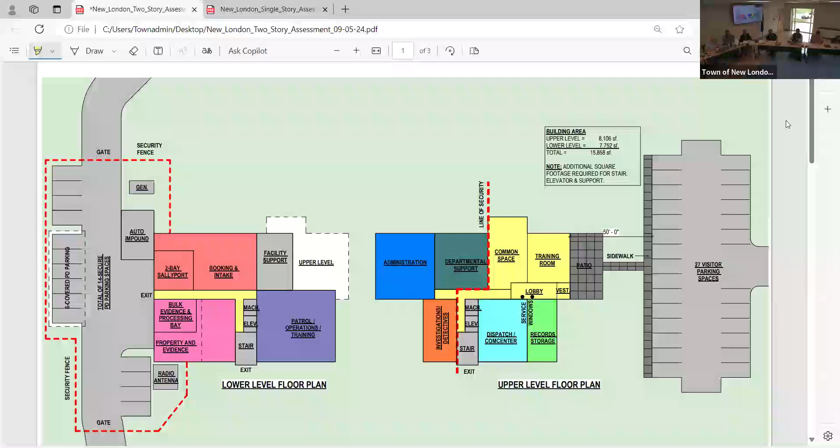Sure, Tony here. To that point, and further on from Phil's question earlier, looking at these two floor plans and talking about the type of construction, you've got about an 8,000 square foot footprint here. The basement's a little smaller, the upper level is a little larger. But in that footprint, on this sloping site, this would lend itself to podium type construction.

Lower level is gonna be a lot more concrete, we might have some steel columns in it. Upper floor may actually be a slab on deck, raising up off of that, and then you build a wood frame on top of the slab, and then a smaller roof line lends itself to trusses. So you're gonna get into some different types of construction.

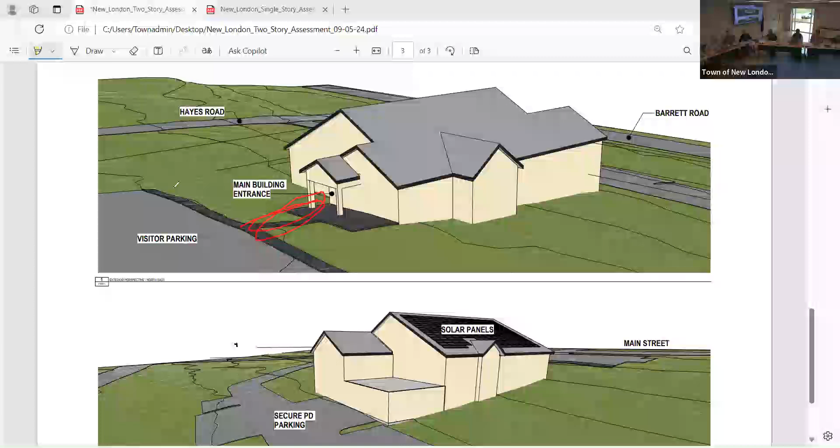When we say it's about a 1,000 square foot difference, adding stair and elevator, those are not cheap square footages. You're adding about 1,000 square feet of total building, but also typically a steel set of stairs, poured risers, poured treads on those stairs. Elevators are an expensive item given the square footage. So the cost model on this layout is going to be much different than just 1,000 square feet at X dollars. There's some complexity, and that's without getting into the site work.

But just to Phil's question before he got there, I wanted to fill people in on the type of construction this would take, different from slab on grade, stick built, throw some trusses up. You can move really quickly in that type of construction. Construction on this site, lay down logistics, this type of operation on a constricted site is going to add cost and complexity.

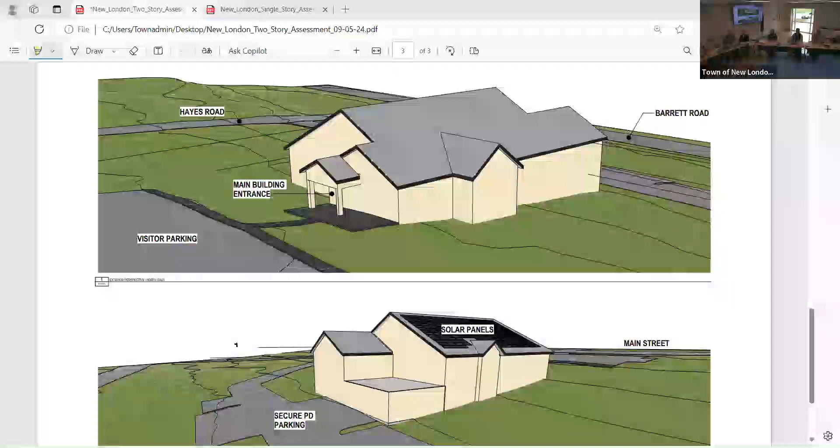I think another consideration with this site is visual from Main Street. We have a big parking lot, give or take the level of Main Street. You're driving down Main Street, looking at the police department, seeing the roof. You're not seeing the facade of the building, not seeing that it's really a police station. It's gonna take a lot more signage, et cetera, to show that it is a police department, compared to Newport Road, which is gonna be a visible statement that it is.

It's hard to tell on the image from Main Street because the parking lot is higher, but when you look at the lower image from the backside, you just see the difference in height.

With about an 8-foot difference potentially between Main Street and the main level of the building, you're gonna be at the height of maybe the top of the windows here. So you're gonna see the police department, but not the ground level, because you'd be anywhere from 7 to 8 feet above it, right? Are you guys with me?

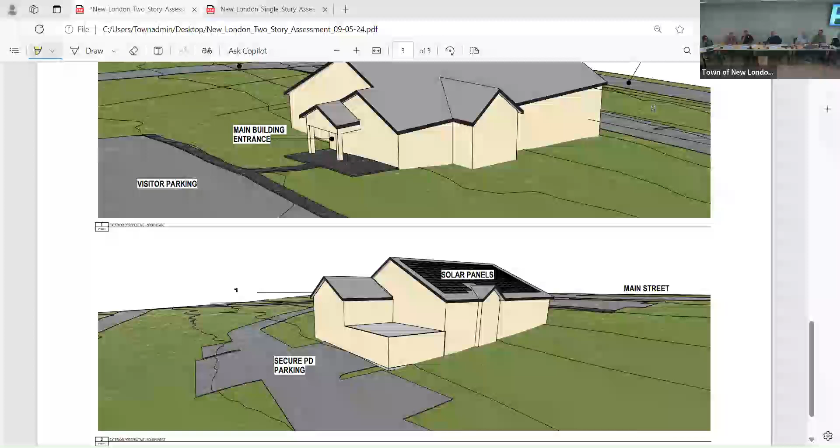It's hard to see in the upper image, but if you look carefully, it is that way. I know there's no ramp, we get that. But you can definitely see it in the lower image, you can see that slope.

Just to talk about elevation changes from the road to the main entrance, we have 8 feet there. From the main entrance to the back of the building, we're dropping another 12 to 14 feet just because of floor to floor heights, working with the grade, and we'd have sidewalks where we can, ramps where we need them.

It's gonna be a different perspective from Main Street than from Newport, because on Newport you're eye level to the building, but on this one you're looking down.

Just looking at some of the massing, similar to what we did on Newport, we're sticking within the neighborhood, using a gable form roof, trying to maximize solar orientation, and having a main entrance from Main Street so that visitors can understand what the building is and where to go.

The back of the building we tried to simplify as much as possible. That flat section in the back would house potentially mechanical units so we could hide them. We're trying to think of these things, spend our money where we can or where we need to, and go from there.

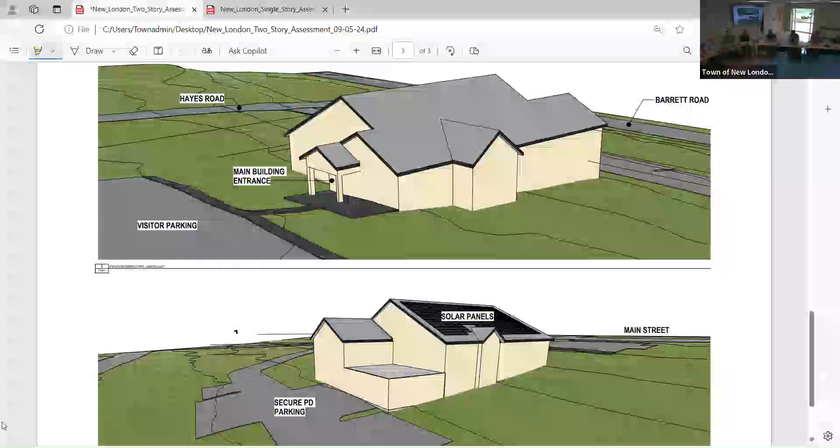This is in the middle of a bunch of residential houses on this site. Disgruntled.

We're also coming to an... we're buying his house. Yeah. Oh.

Those same neighbors may vote no on this and yes on Newport Road, right? So you do want to be a good neighbor. We would have to go eventually through site plan approval.

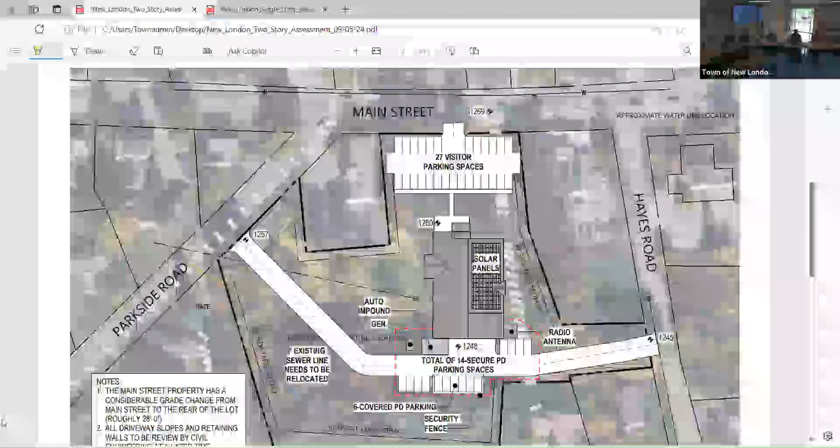Recently I've been involved in a project where citizens didn't want a public safety facility in a certain location, so they voted against procurement of that site. They voted positively for the $11 million for the public safety building, but they shut down the site and we had to go find a new site. The project went forward, but in a different location.

So just to wrap up our presentation, I think John, our recommendation—and it's up to Colliers and the town—is that the Newport site seems to be very advantageous. Our recommendation would be to move forward and not come to a standstill, but it's up to you folks.

To do Newport, we'll share that with VHB, get any other input from VHB, our civil engineers, if there's anything else we're not thinking about that may impact it. They've already given us the constraints map, because of setbacks and utilities, but just to be safe.

And then to develop that to a space plan level, with a little more developed exterior imaging. On the Main Street side, we suggest having VHB look at it. They'll delineate possible locations for things like retaining walls, check driveway grades to make sure it's not a black diamond ski slope, and show things like a ramp into the building, which we're aware needs to happen, but not develop that any further than the block plan. If you ask for our recommendation to be good managers of your money and time, that's what we recommend doing. That would enable us, two weeks from now, to have a space plan and better developed image of the Newport site, and have all the information available for Tony, at least site-wise, for the Main Street site. That's our recommendation, but we serve at your pleasure. It keeps the ball moving forward.

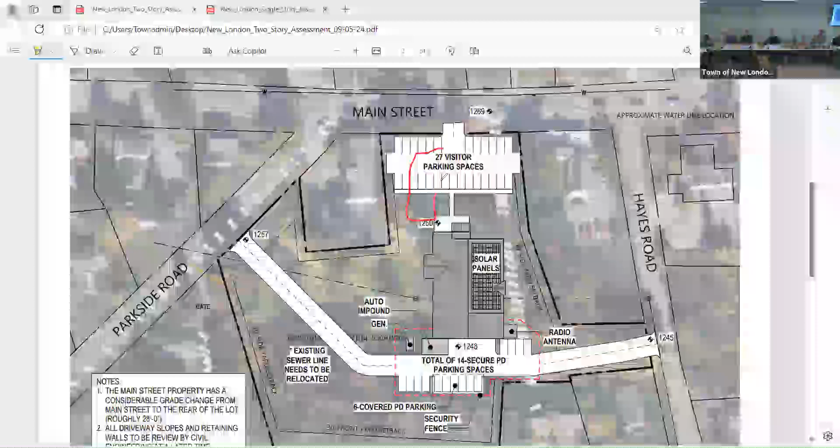Yes, a couple of thoughts, maybe more for Adam. If any private entity came into Main Street in New London and said, I want to build a building and stick a parking lot in front of it, they would bodily throw them out of the room. We have a portion of town that's a bunch of parking lots with buildings behind them. That's not Main Street. So I'm asking whether we've turned a bias toward keeping the building on Main Street rather than, for instance, Parkside, into something that is never going to fly, and the thumb again sits on the scale. The other question I had was reflecting back on two or three meetings ago, there was discussion about when we're going to get to wants versus needs, because much of this seems to flow around the large visitor parking lot, which is tied directly to the provision of another community room. So the visitor need shrinks to a fingernail-size area without that community room. I'm wondering, before we charge all the way down this road, when some of those discussions are going to happen.

Phil, from the perspective of the parking on the street, you're 100% correct. The site plan review regulations request that parking be to the side or rear. It does allow for waivers to be granted when that's not possible. My guess is it's not possible, or they wouldn't have presented it differently here. You can rotate it maybe, or something, but there's ways to skin that cat.

But that community room is not just a community room. It's really primarily a training facility, correct? I mean, Chief should speak to that.

Just to finish Phil's point, that is my largest reservation with this design - the parking in the front. The planning board has worked hard to encourage developers to remove things, and we're very excited to be losing the second to last parking lot that backs out into Main Street in short time here. So that would be a disadvantage in my opinion.

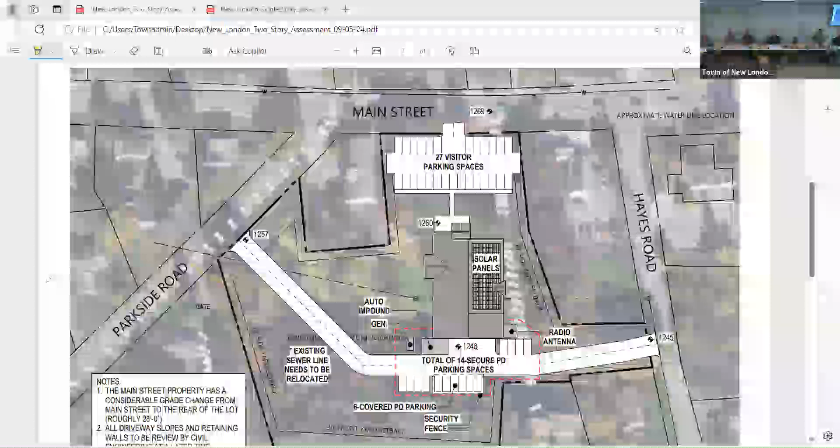Have you checked with the water district to make sure you can connect? You might want to do that. Can you give me a little more on that? Let's put it this way - this building has a lot less water use than 80 apartments - 60 apartments, sorry.

I can't tell if anybody is talking or not. We were just discussing that we would be in the precinct. Okay, that would be a conversation we have to have about providing water. And Bob offered that it's much less water usage than that. Oh yeah, very much so, yes.

Okay, I think where we're at now, Bob made it clear it would be nice to have some directive on whether we still look at both properties or just focus on one for the next meeting. But given that we got these yesterday and we've now had conversations, I'd love to get a sense from our committee members, even though I can only see 6 people here, whether they want more time to digest everything before the next meeting, or if we're ready to say move forward with one location over the other.

I didn't actually say that. What I said is that we can develop Newport further, but provide the site information to the committee and to Tony.

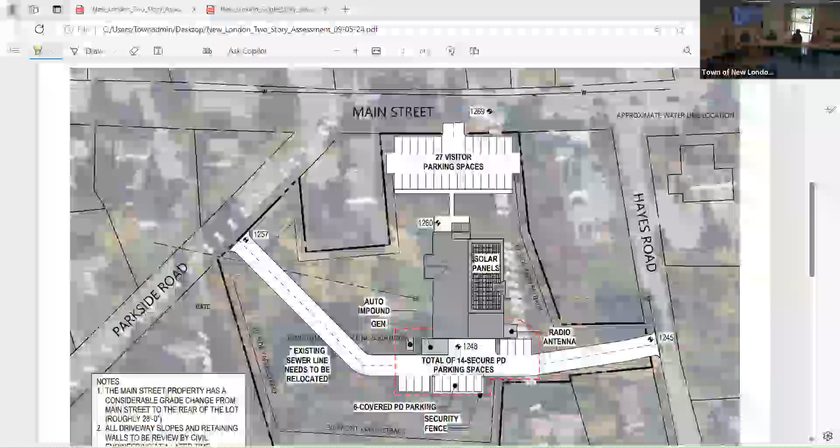We've talked about it, and you're comfortable moving forward with greater detail on Newport Road. That's fine, but we still need to backload how we got there. I've been taking notes on all your questions as we go along, and I'll carry those as exclusions or inclusions with additional costs, so that when somebody a week, a month, or a year from now pulls out that document asking why did they do this, it shows the Main Street site had these constraints, these cost riders, and gives you something to speak to in the future. That's fantastic, thank you, Tony.

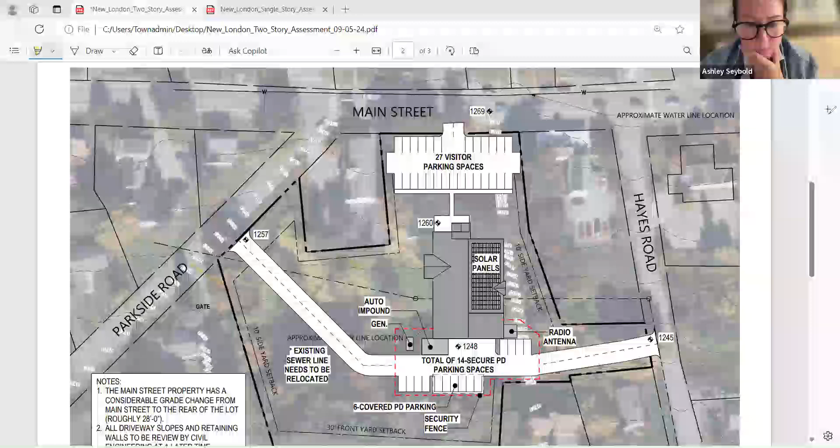Okay, so that's what we'll work toward for our next meeting in 2 weeks — greater detail on Newport Road, additional info on the Main Street property. I just encourage committee members, I know this is a lot to take in, and if you're anything like me, I'll continue thinking about this for the next 2 weeks and have questions. Feel free to send those over and we'll get them to Colliers and Lavallee Brensinger, so we can address them at the next meeting as well.

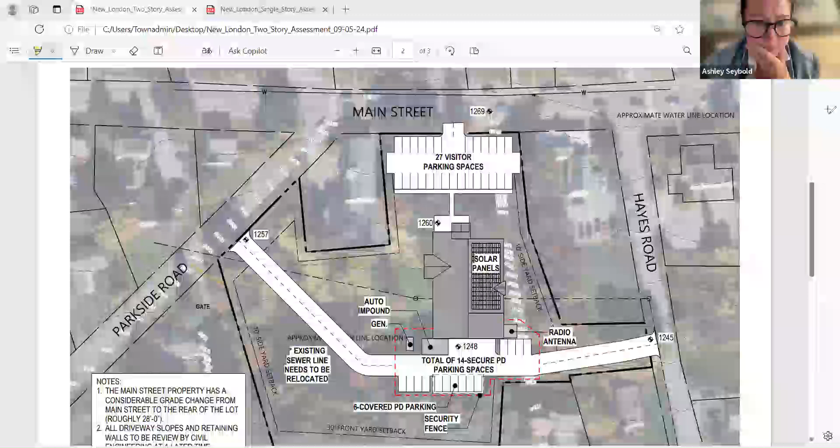Is there anything I'm missing? I know we're just about at 10 o'clock. Anything else from our committee members or our partners who are here?

Just one question — I believe last meeting you were going to go look at the old Sigma building, the Broom building as they call it now. I'm just curious what the purpose of that was. Is that to look at possibly buying and renovating it? I think it was, because that property had been on the table at some point in the past, so probably just take a look at it and see if it was still a possibility — maybe bring in an architect or engineer, but just from what I see.